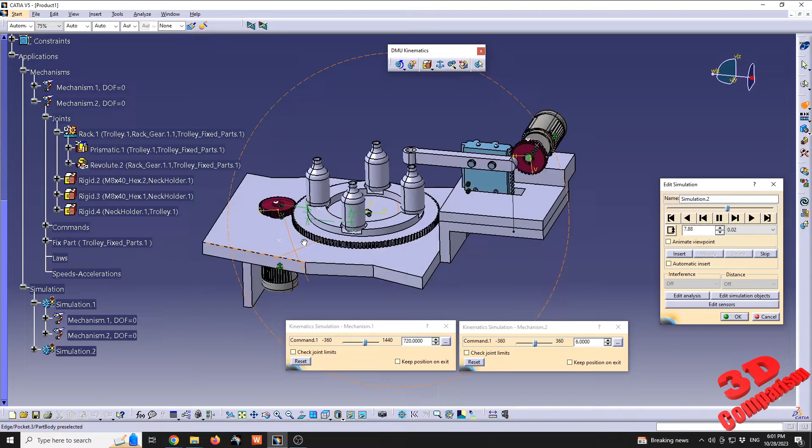I will put the files within the video description, so let's see the final simulation within CATIA V5. We're going to have two mechanisms, both will be angle driven. Where we have the motor, we'll have the first gear angle driven, and for the second one as well, we'll control the rack position.

To get started, I will start from scratch. That means I'm going to close everything, and we're going to see the files will be over here.

Now, initially I will define an assembly. Within this assembly, I will select it, go to components, and add existing components. We could also make use of existing components with positioning, which would also define some constraints when the elements are added. But for this case, I will just go like this.

So let's take a look at the file. It will be this one, DMU Kinematics. I will use the preview thumbnails, in this case for large icons, and let's take a look.

Within those files that you can download from GrabCAD, we're going to add the bottle, the fixed components for the first mechanism, the large gear, and the metric 8 bolt. We're going to skip the motor, because this will already be added within the fixed part, as well as within this subassembly.

We're going to select the neck holder, part 1 as well. This will be embedded within this subassembly. I will select both small gears, so small gear and small gear trolley, the trolley, and also the trolley fixed parts. So these are the components that will be added.

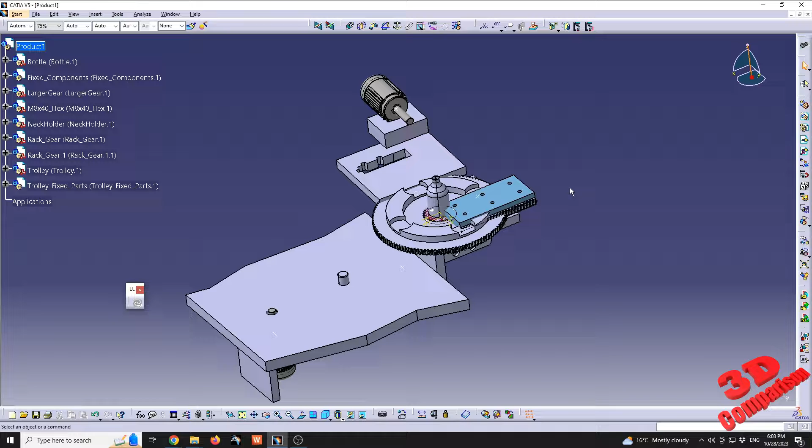In this case, I will select the trolley and move it to the sides. I know that the bottle will be within this mechanism on the left, the large gear as well on the left. This will be the rack gear, as you can see by the name.

I'm just going to move it over here because it's actually the same gear for this joint and for the other one. And we're also going to have the bolt that I'm going to move, and the neck holder for the bottles. So these are the components. I'm going to disable the snap automatically to selected object option.

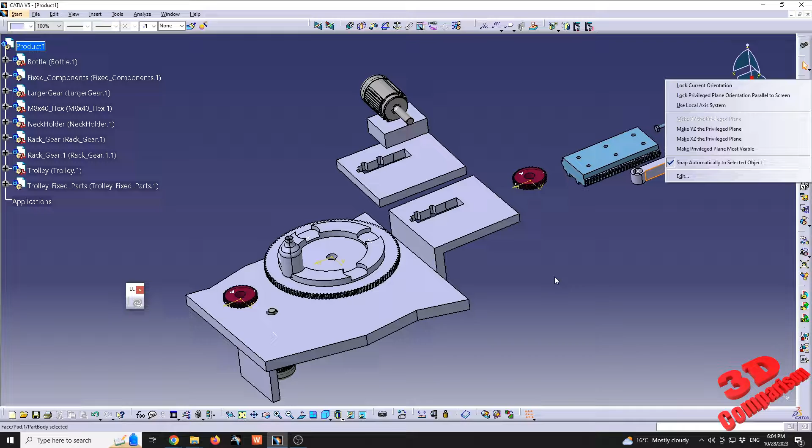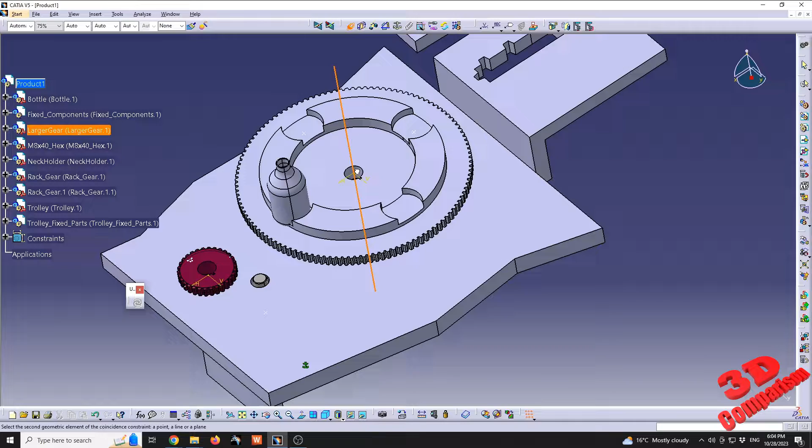And we can start positioning the components. So I'm going to define a fixed component for this large assembly, named fixed components. Afterwards, using the coincidence constraint, I'm going to position the large gear over here.

I'm going to press Ctrl and Y to redo the last feature. In this case it will be a coincidence constraint, and I'm going to position this all the way to the flat table over here. I'm going to do the same with the small gear.

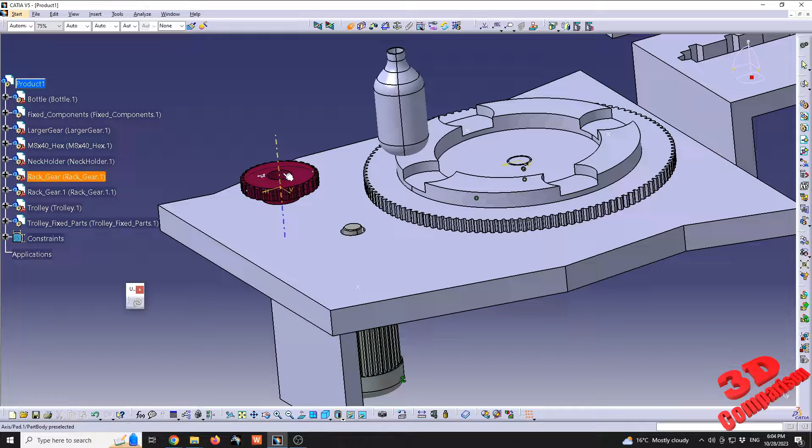Again, Ctrl Y to rapidly redo the last feature within CATIA. Again Ctrl Y, and we're going to add this coincidence over here.

Now for the bottles, we need to have a total of 4 bottles. Therefore, I will select the bottle, press Ctrl plus E. This will define multi-instantiation.

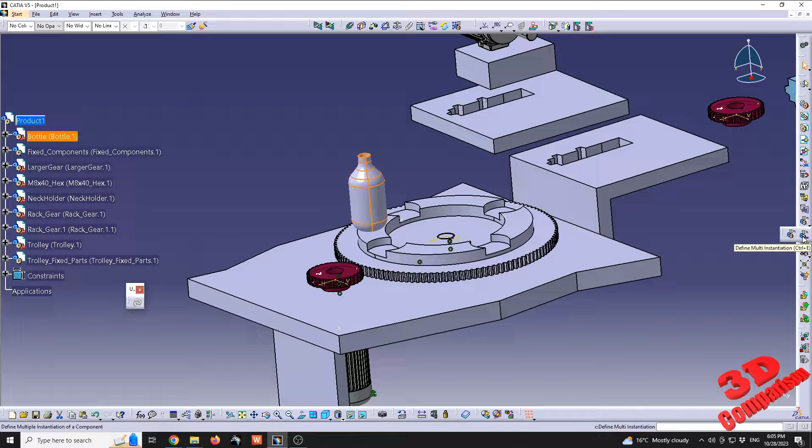And I will define a total of 3 additional new bottles. Afterwards, I will hit OK. If for some reason the alignment of the bottle is not the same, you can swap that over here within the reference. You can also increase the spacing, but I will just leave it like this since we're going to reposition those.

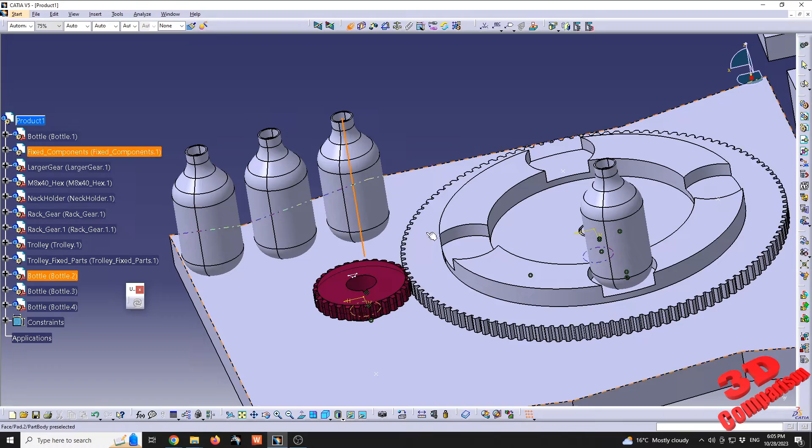After that, I'm going to press again on coincidence, and we're going to position the bottles on the large assembly. Each bottle will also have a surface at the bottom that we can use to finally position that bottle onto that gear.

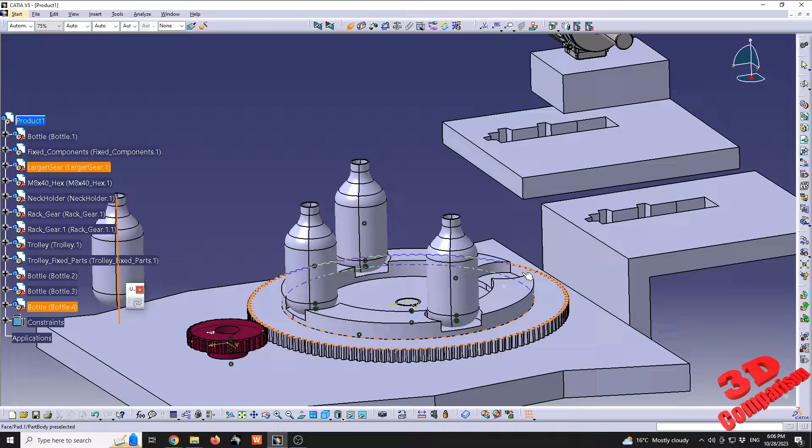So this is quite repetitive, but you can make use of hotkeys in order to rapidly align those components. We still have the last bottle with this axis. You will always find the axis over here on the width of the component, and afterwards we're just going to have that surface. So all the elements of the first mechanism are properly defined.

We can now go to the second one. So I'm going to coincidence this with that.

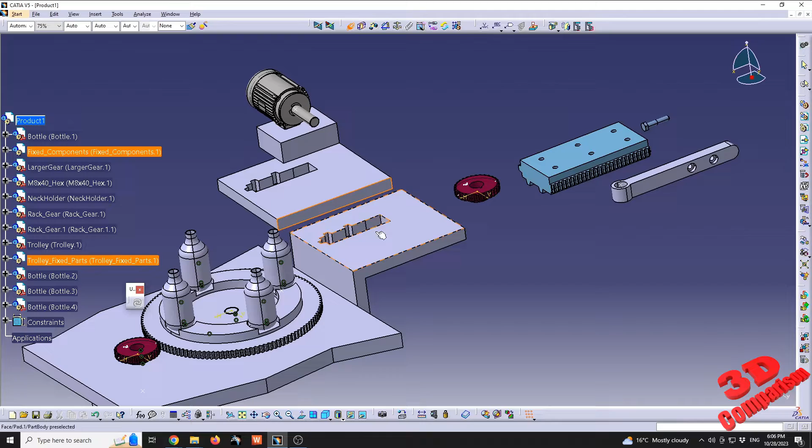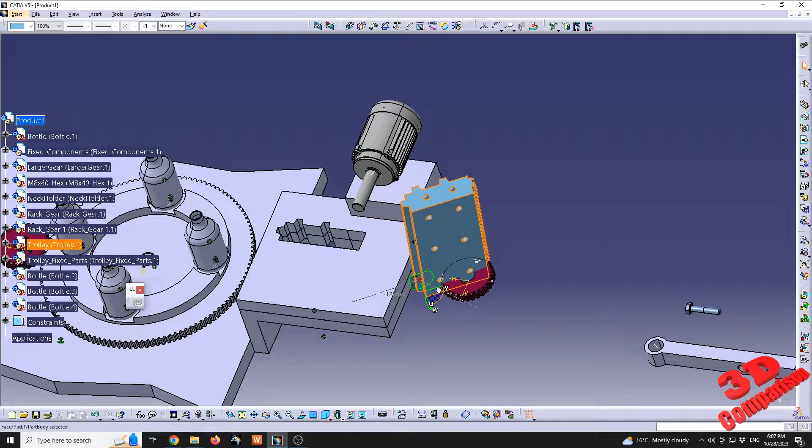Again, Ctrl Y, and we're going to position this as well. Now to make it easy for CATIA to position this, I'm going to use the compass again, so snap to selected, and you're going to see that this trolley should go over there like a puzzle. That means it should be rotated within this position. So I'm just going to slightly rotate it.

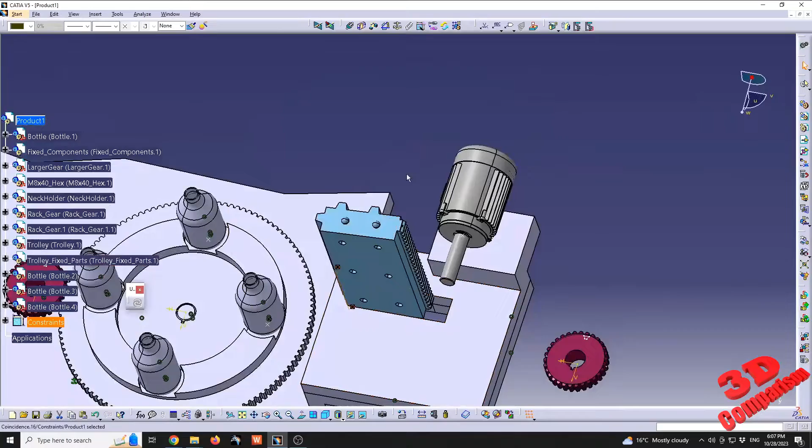Close to the final position, and afterwards I can make use of the coincidence. Let's see, this edge should be coincident with the edge over here. And afterwards we can also add a plane. So this plane should be coincident with the plane over there. And we see that we're going to have that position.

Now, depending on the length of the bottle, this can be adjusted. So for this case study, I'm just going to select the trolley and move it on the z-axis a little bit down. So this will be the axis. I'm just going to slightly move it until this section will be close to that top area. So we see those two cutouts. Somewhere like this should be good enough.

We also need to position the second gear over here on the motor.

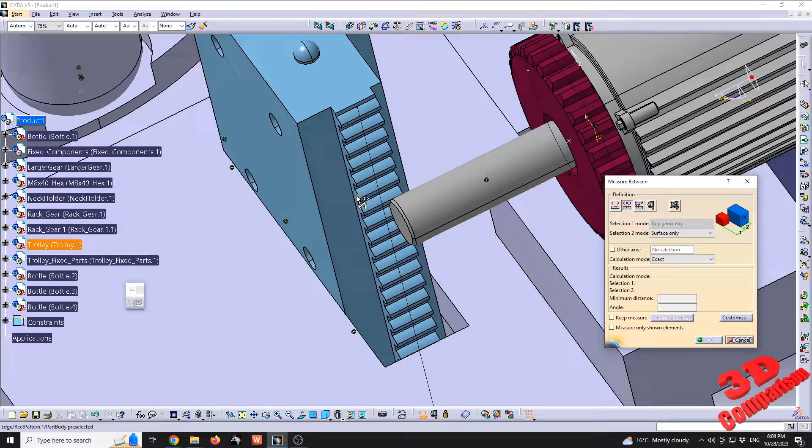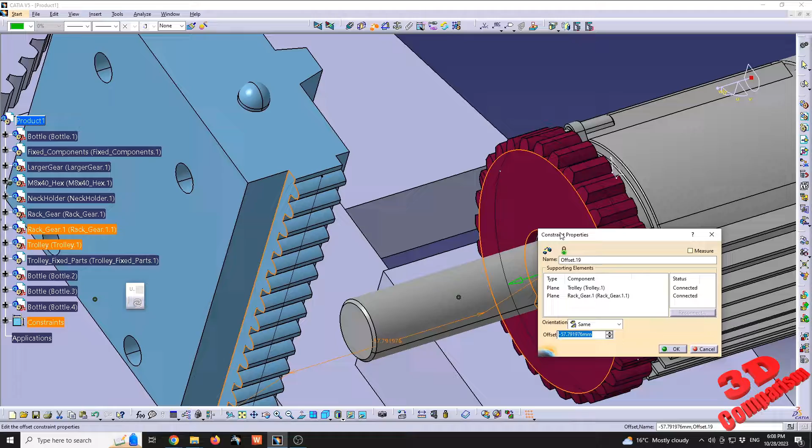Now for the final position, I'm going to measure this trolley. So that means I'm going to make use of the measure between. From this section all the way over here, we're going to see 14 millimeters. And if you're going to measure this as well, we're going to see that this will have 12 millimeters. So that means I need to make use of an offset between this one and that one of 1 millimeter, and that should center it, in this case, -1. And we're going to see that that will center the gear.

Now we're just going to need to replicate, multiply once this bolt. So I have a total of 3. I'm just going to delete the last one.

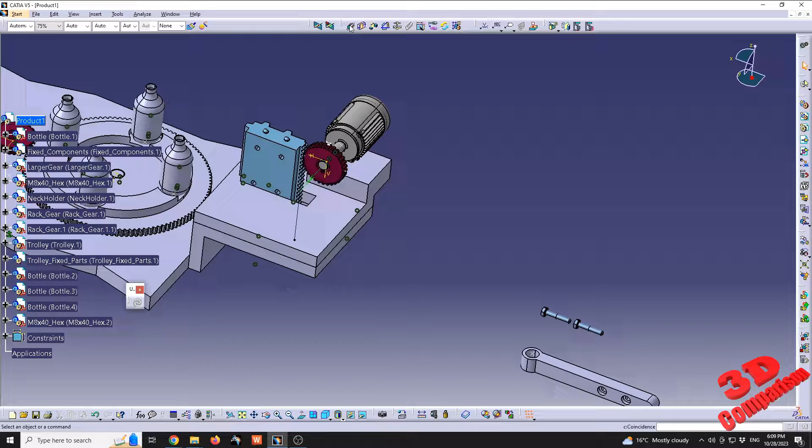And we're going to start positioning these components as well, so that should fit over there. We can center both like this, and afterwards we just have the final position which will be this one, coincidence with that. Now we can also position those bolts.

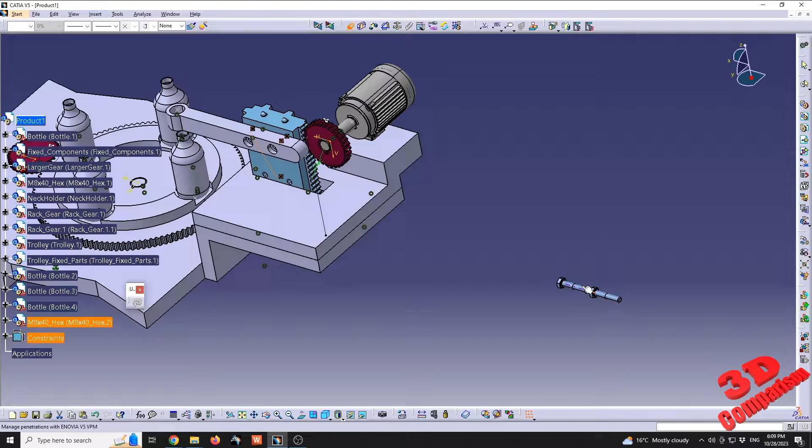So we have the axis. We see that this has been reversed. That means I can go within that. It will be easier if I will just delete that, and I will slightly rotate that bolt.

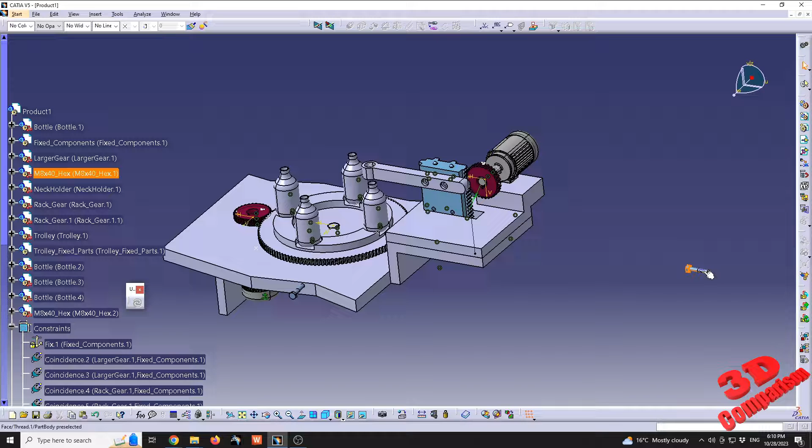And afterwards we're going to have that again multiplied over here. So I will delete this as well, so double click within that, have that deleted, multiply this once. Let's see where will the second one be added. So component to multiply will be this bolt, and we can define the axis like this.

Now keep in mind that this model is not, let's say, at the true scale, so we're going to have a little bit of collision between this bolt and that neck holder.

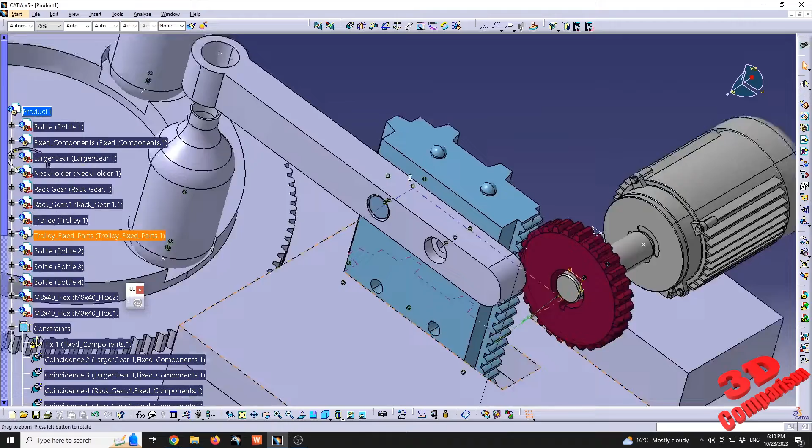I'm going to position it like this, or I can move it even a little bit to the outside area so that it will be easier to work with that. So we already have the axis, which is for this bolt, and now I will define that this surface should match the outside surface.

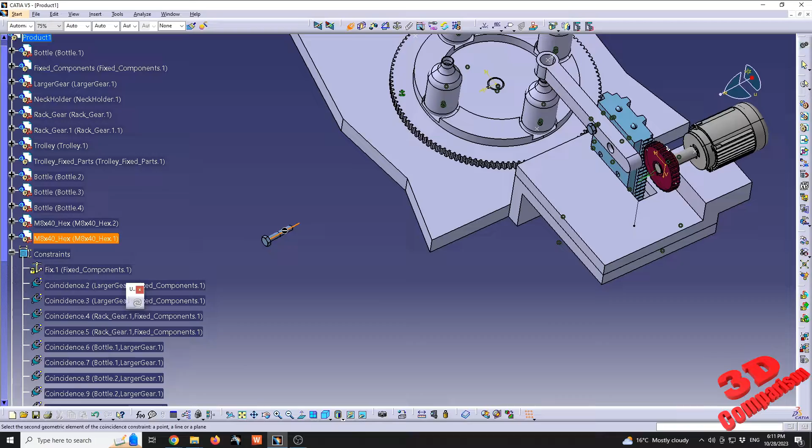And we're going to do the same for the other one over here. And we just have the last surface, which will be that surface with this one. So we have the components in position.

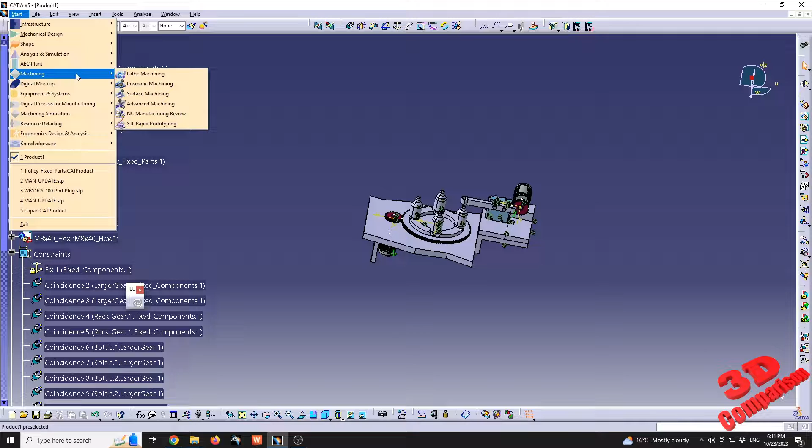Now, if you're going to swap to DMU Kinematics, you're going to see that within DMU Kinematics, we have the possibility to use the assembly constraint conversion. But in this case, since there are two mechanisms over here, CATIA won't be able to properly define those.

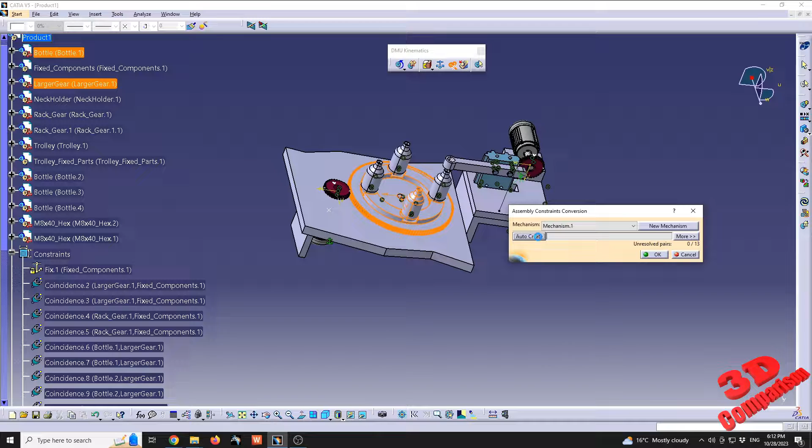So we can define multiple mechanisms over here, but as an example, I'm going to define a new mechanism. I'm going to define a second one, and now I will leave CATIA to auto-create. But as we can see, there are totally a number of 13 pairs of components, and I will go with auto-create. And you're going to see that they have all been resolved.

That means that CATIA has converted the constraints within the mechanism. But all have been added over here to mechanism 1. We see the joints that the software decided to add, and there are, let's say, not pretty well defined.

I have another case study on my channel over here. If you're going to search for DMU Kinematics, this assembly constraint conversion. For some components this works pretty good, but for this one it doesn't.

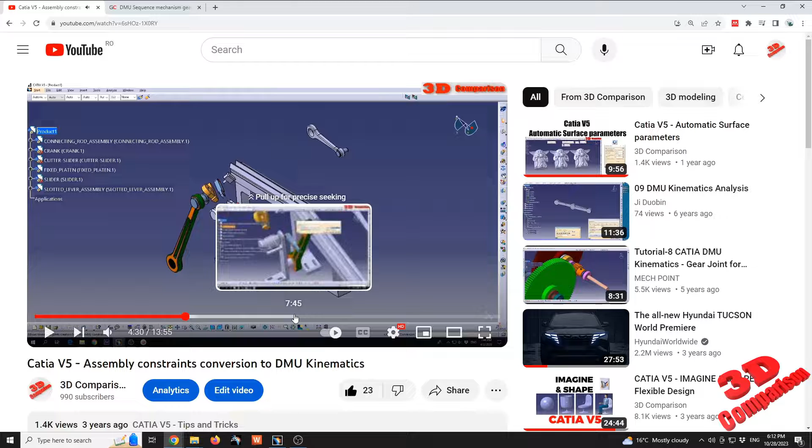So over here the software managed to add those quite well for this mechanism, but since we are currently having a more complex mechanism, CATIA wasn't able to do that. Therefore I will just delete the mechanism created by that auto conversion, so delete all children for this. The same for the second mechanism, and we're going to start from scratch over here.

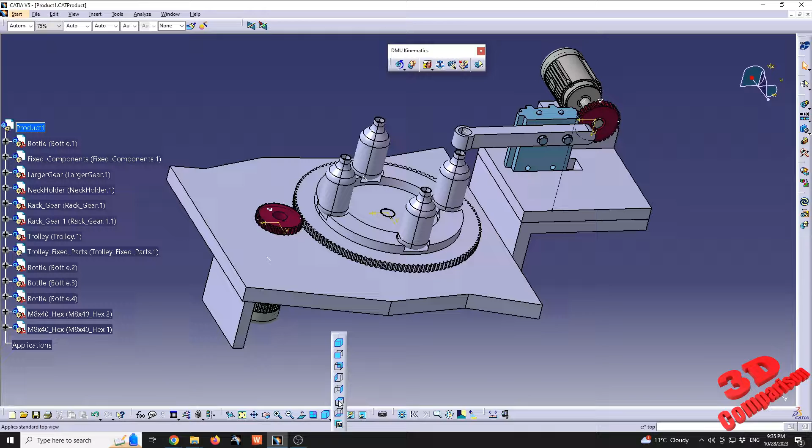So before I start defining various joints, I also want to check how the gears are interlocking. Therefore I'm gonna go over here. Afterwards I will go to the top view, and we're gonna see within the top view that over here we have some collisions between the large gear and the rack gear over here. Therefore I'm gonna slightly rotate the small gear.

So I'm gonna snap automatically to selected with the compass. Afterwards I'm gonna select the small gear. And now I could rotate on this axis, but I can also right click on the red spot over there, on the red vertex. I can go to edit, and I know that this will rotate along W. Therefore I can slightly rotate this gear.

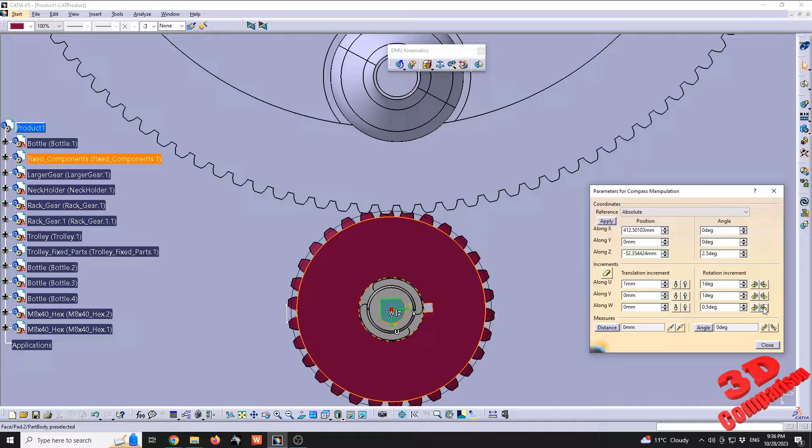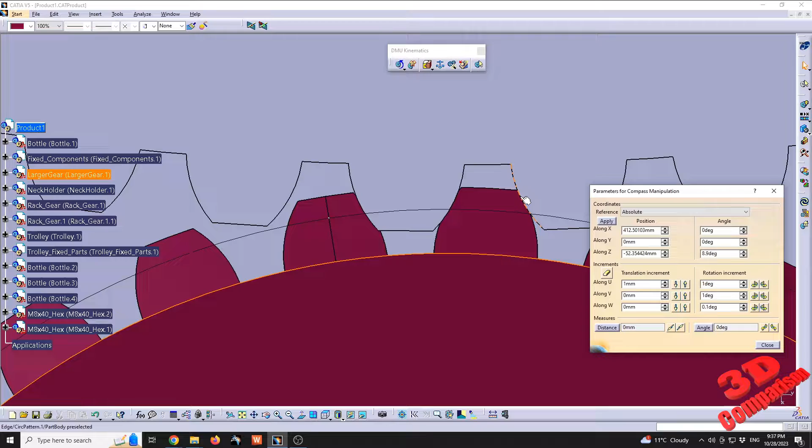Now I will position the gear over here. The models are not very accurate, therefore we're gonna see that some overlap will still remain within our model, but I'm gonna position them something like this. We can even go with a smaller value, for example 0.1, and in this case with 0.1 those will overlap like that. We can do the same for the other gear over here, but let me just check how they are interlocking now.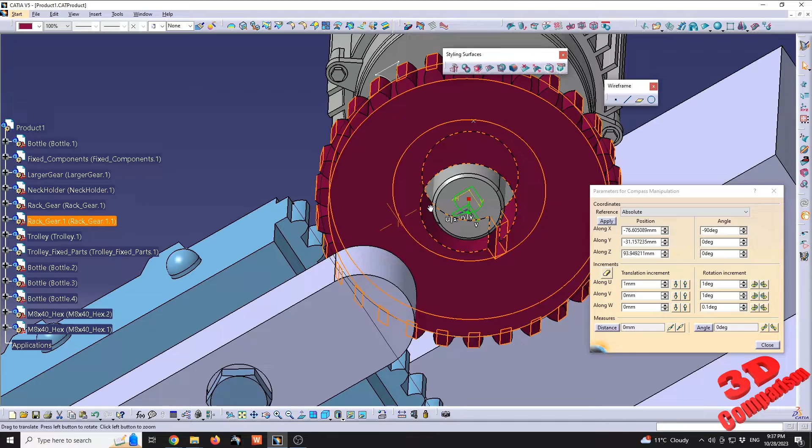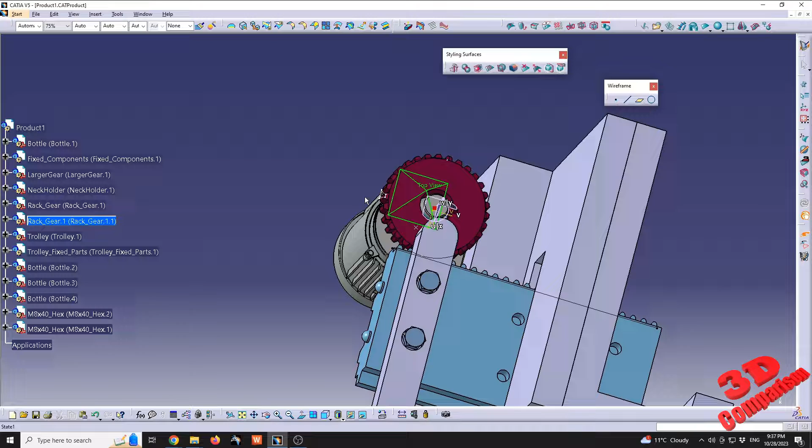And we see this is slightly misaligned, therefore I'm gonna go within edit, and I'm gonna select a different view. So in this case the left view will be this one from the top. So in this case it will be front view, and we're gonna have this view. We can also change views by pressing F4. We're gonna see that we can move the mouse within the viewport. Therefore we're gonna know that this will be the top view in this case, where we're gonna see the alignment of that.

So I'm gonna go within the top view, which will be over here. Now I see that this rack gear is, let's say, blocking the view. Therefore, I can just hide it for now. I also added Alt-V as a hotkey. This is similar to Fusion. I highly recommend that you use hotkeys. And now we see how this gear and rack will align.

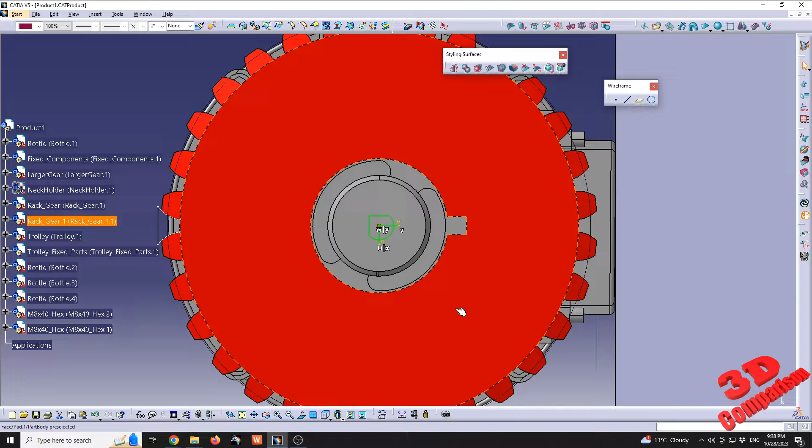Therefore, I'm going to start to rotate this. So for the axis, we're going to see that if I rotate it on this axis, it will slightly move like that. So I'm just going to undo that. Even though I undo, the part is still in red. That means there's a local update within the assembly. So currently I am within Imagine Shape workbench. I'm going to double click on product 1, press Ctrl and U for update, or we can click on that.

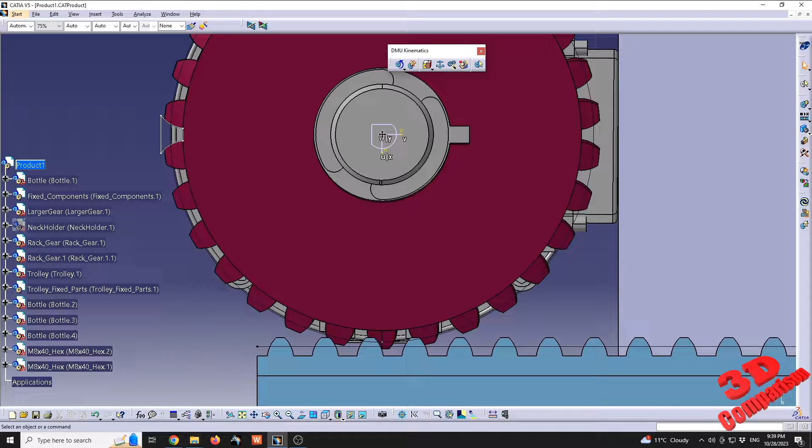So we see update position, the gear rotated on this axis. Therefore, that was not the correct axis. So keep in mind when you are rotating components to always verify the correct axis. So I'm gonna rotate it back until we're within a normal view. So we see with 1 degree it should rotate like that, and this is again close to the normal view.

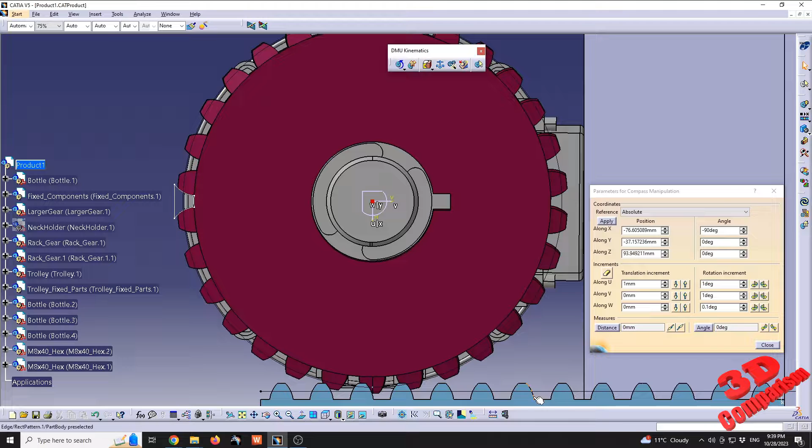We can also go over here for the absolute rotation, and I can add -90 and 0, and we know that if I hit apply, the model will be within the initial alignment. Even though I see there are some slight rotations over here, I'm just going to press F2 to check if we are within a different view. So if I go to view, we're going to have render styles, but this is parallel. Therefore, the object is slightly rotated.

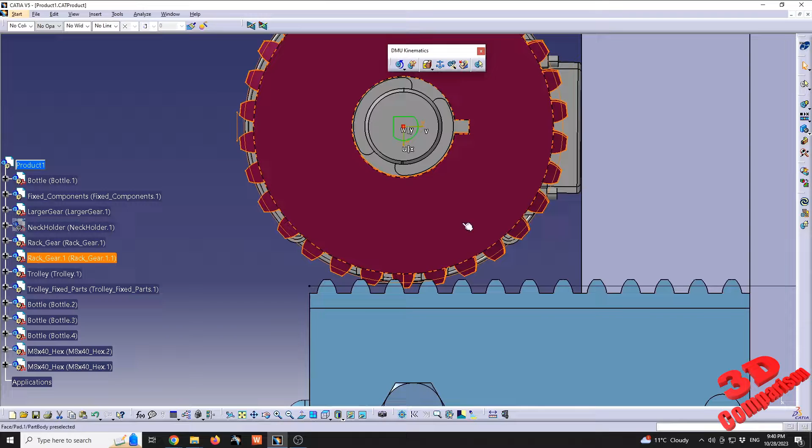As we can see on the rack, with normal view, we don't see the other, let's say, edge. But over here, for the gear, we're going to see that. So I will just slightly change this. We have the absolute values, and we see that for some reason the absolute values are okay positioned, but still the object is a little bit misaligned. Therefore, I'm going to slightly rotate this. So I'm going to go with 0.5 on that axis. Okay, so I will leave it like this, even though there are some slight misaligned components over there.

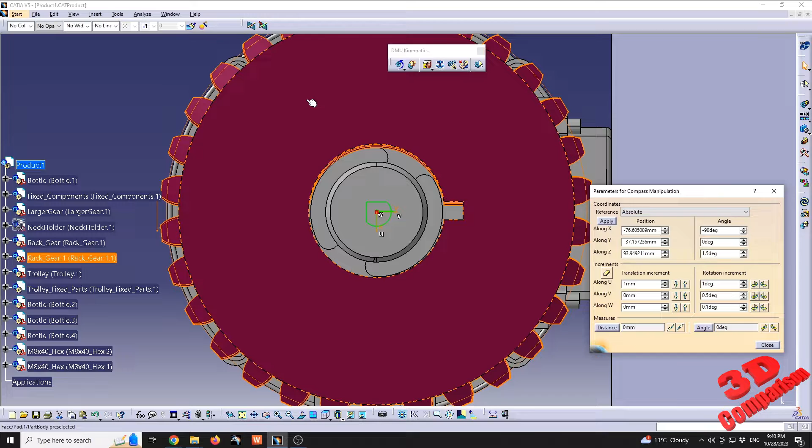In order to fix this, the easiest solution is to add some constraints and afterwards have those deleted. So to do that, I will go back to assembly design. We're gonna go to coincidence, and I'm gonna make this coincident with that. As you can see, those have been aligned, and we know that we had an offset between this face and this face. We see that there's already a constraint over there, so I'm just gonna have that deleted for now. Realign the gear over here on that.

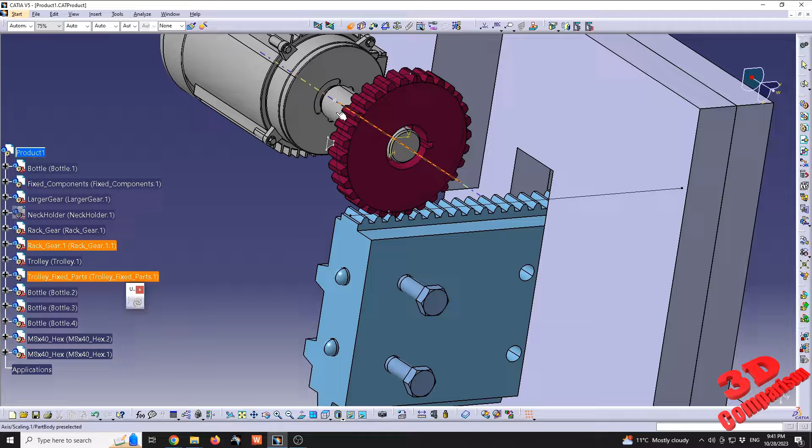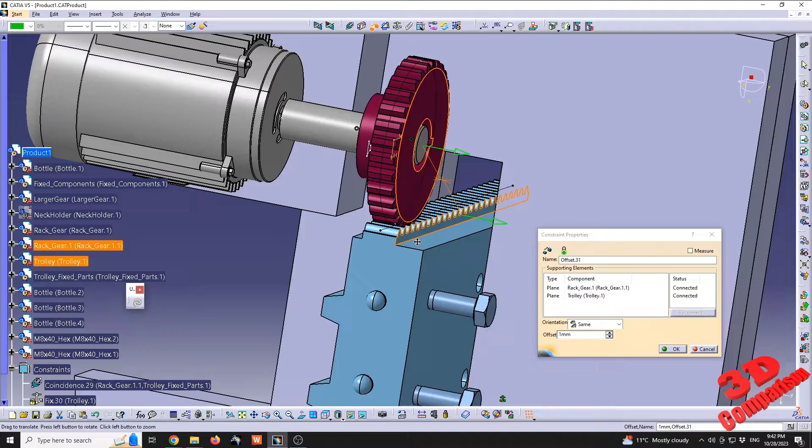Afterwards, position it at -1 millimeter, and as we saw, the rack moved in this case, so that is not what we want. We want the gear to move alongside the rack. Therefore, I will make that fix, and now with an offset I will calibrate this to be at 1 millimeter, and now it should be properly aligned. Therefore, I can have all of those deleted. I can go back to that view.

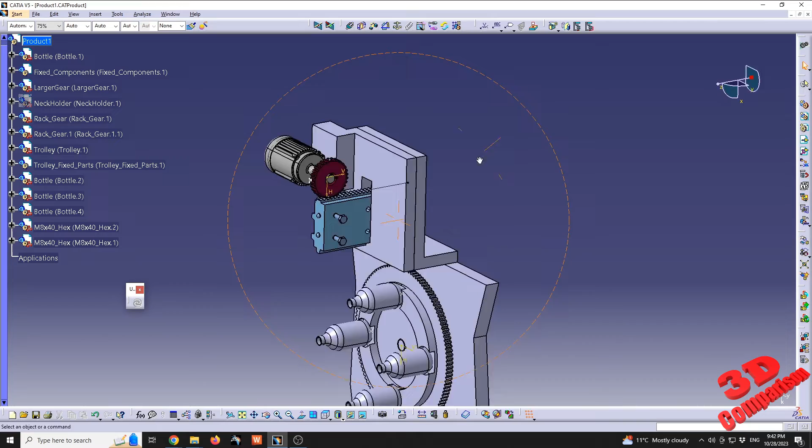Therefore, I can press F4 and move around, but as we can see, since now I'm in assembly design, that won't work anymore. So if I press F4, I'm not able to select those views. But if I go back to DMU Kinematics over here, we're gonna see how we can manipulate that camera.

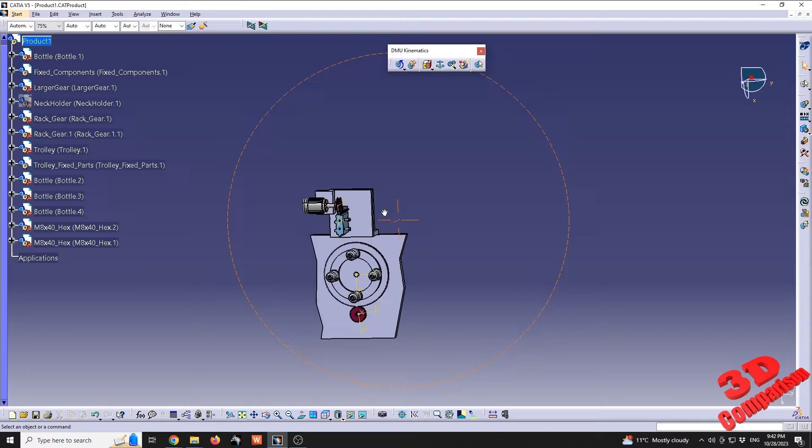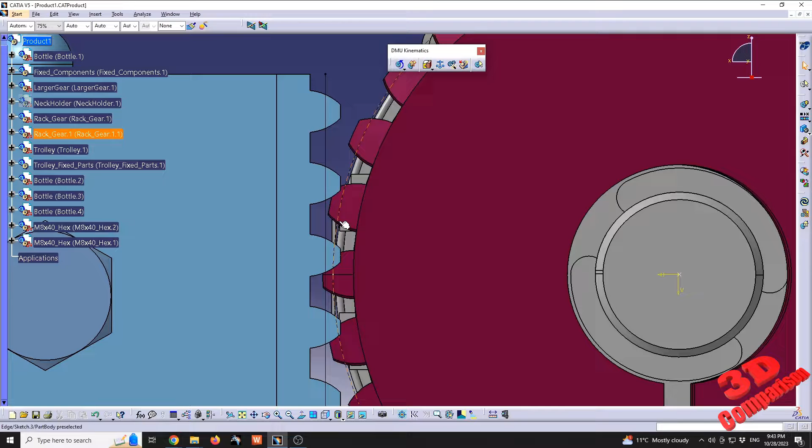Okay, so for some reason that F4 doesn't work anymore. Therefore, I will just make use of the standard views. So we have the left view and we have the right view in this case, which will be this one. Okay, so I see that the gear will be slightly rotated, so that's how the model was. It's not important to calibrate it.

Since the model has that bend shape over there, we are just gonna rotate it on this axis, which will be this one. So I will grab that axis and I will slightly rotate it. So I'm just gonna position like this. As we can see, this gear and the rack will be better, let's say, defined than the small gear and the large gear. Okay, now since we have all the elements aligned properly, this is why it's important. So for this section, if you wanna calibrate the exact alignment, you can do that easily using the compass.

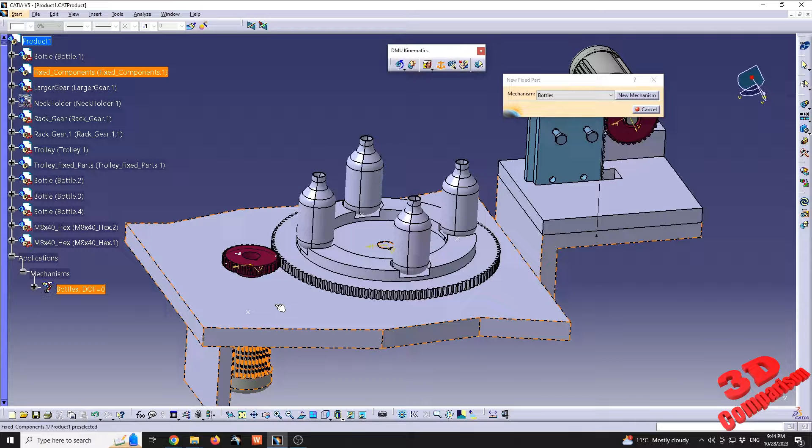Now we're going to define the mechanism. So the first mechanism, I'm going to start with the fixed part. So we'll go over here to the fixed part. I will define a new mechanism. We can leave it as mechanism 1, or we can give it a different name. For example, bottles. I'm going to click OK. And afterwards, with the mechanism bottle selected, I'm going to move the cursor over the fixed component over here. Therefore, within the newly defined mechanism, this will be the fixed component for this bottles mechanism.

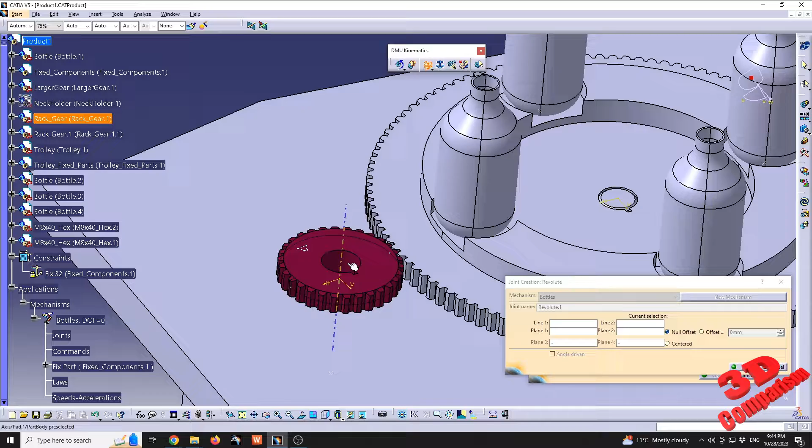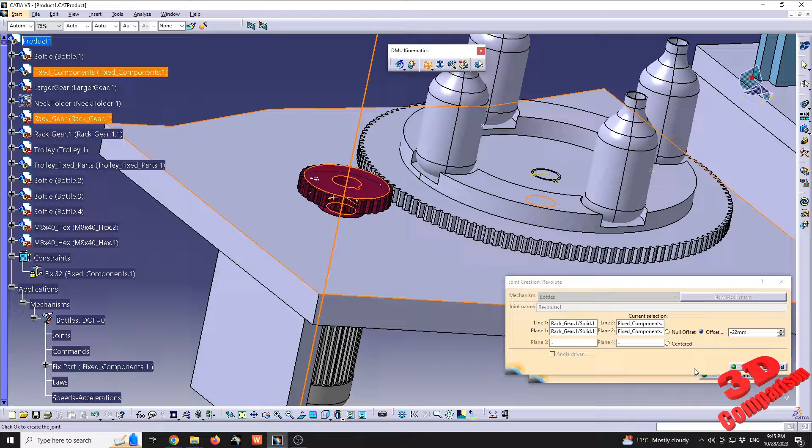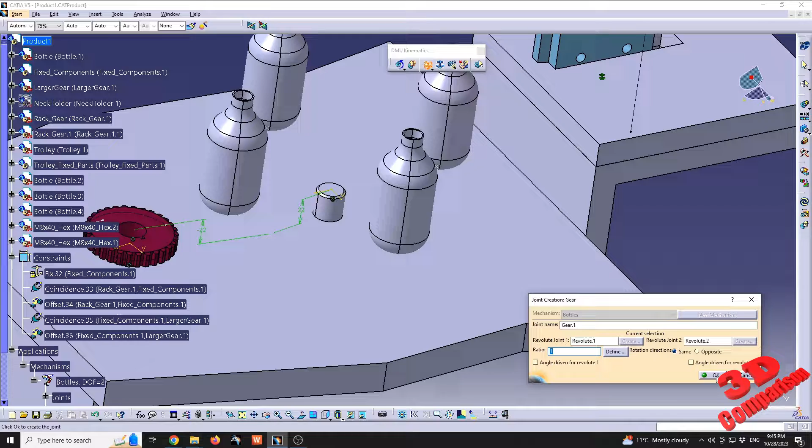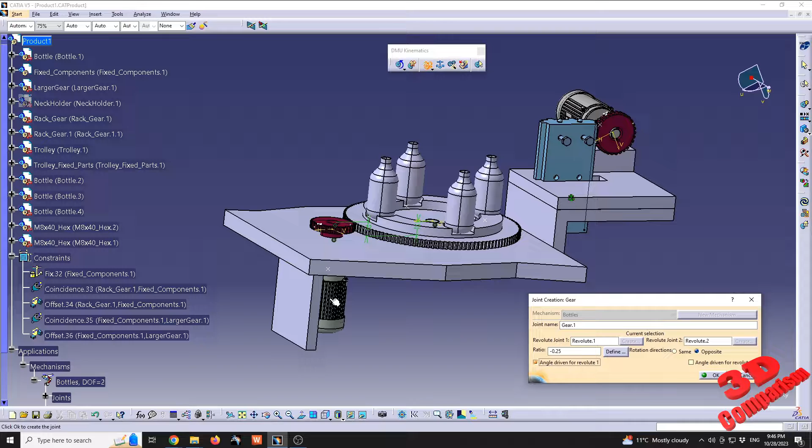And for the second one, I'm gonna hide the large gear and I'm gonna select the middle axis. Afterwards, the axis inside the gear. Now the top surface and the bottom, and again I will maintain that 22 millimeter offset. I will send the large gear back so we can see how that will simulate. We know that this has to be opposite, and for the ratio it will be -0.25. Now to define the angle driven component, since we have the motor over here, I'm going to define that angle driven revolute 1 will be the driven one. And afterwards we can click OK.

We're going to have this notice that the mechanism can be simulated. Therefore we can start that bottle simulation. And I will go all the way to 360. Afterwards I will hit insert and I will check the animation to see if those gears are properly working. So as we added that opposite and that minus 0.25, those gears should work properly.

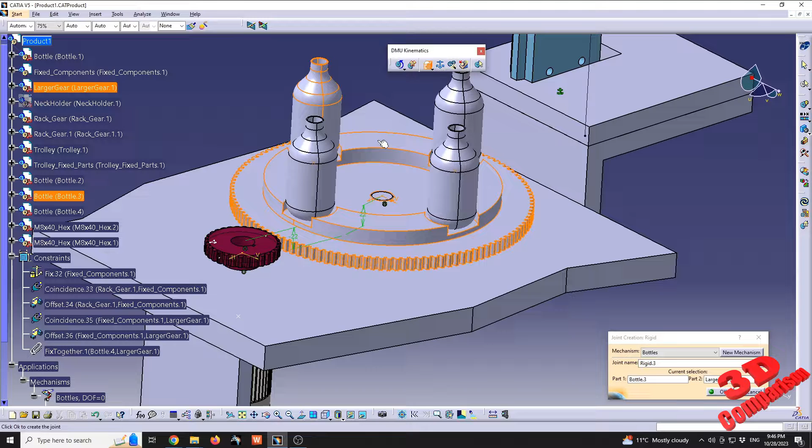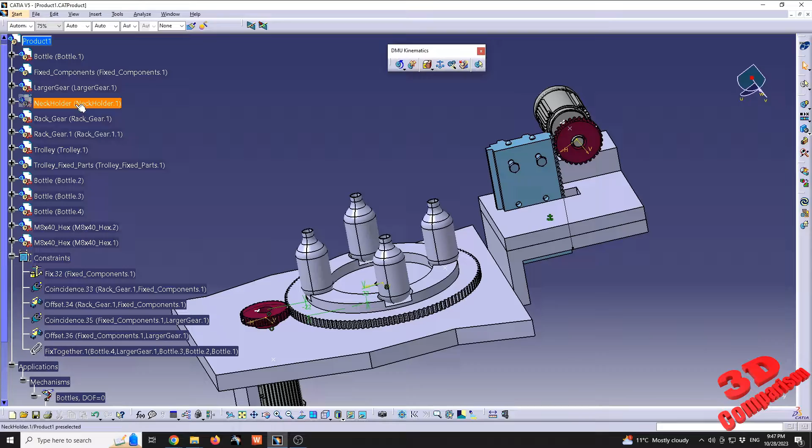And now for the first mechanism, we just need to add the other components, which will be the bottle. This will be set as rigid joints between the bottle and the gear. So I will just redo that for all components by using the hotkeys for the last feature, which is Ctrl and Y within CATIA. And now if I try to simulate this, we're gonna see that all the bottles should move along with that gear. Okay, so we have the first mechanism defined. Now we have this neck holder that will need to be activated by the trolley. Therefore, I will show this. So we see that bottle neck holder over there.

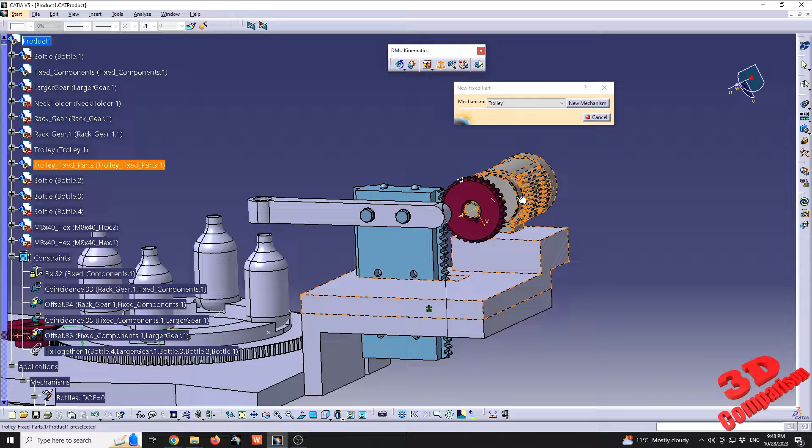Now, for the second component, the workflow will be the same. Therefore, we need to define a fixed part. But this new fixed part will be created within the new mechanism, which I'm gonna call this. Okay. We see that this is the neck holder. I'm just gonna call this trolley. And for the trolley mechanism, the fixed part will be this one. So the sub-assembly that has this extruded part and the motor. And now we need to define the components over here. So as we can see, we have a gear joint and we also have a rack joint.

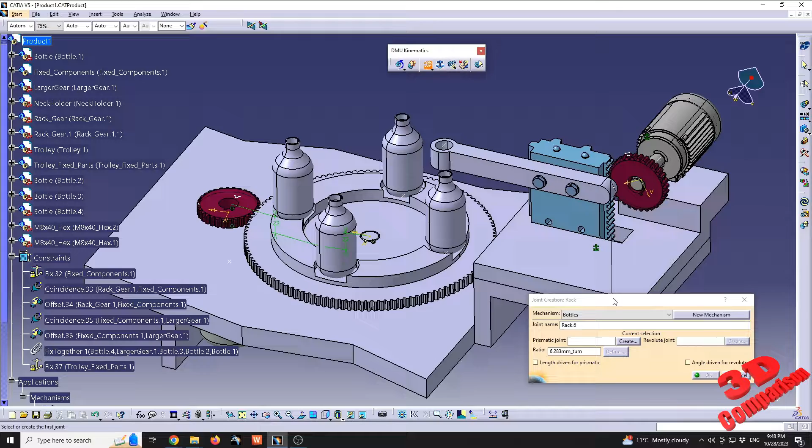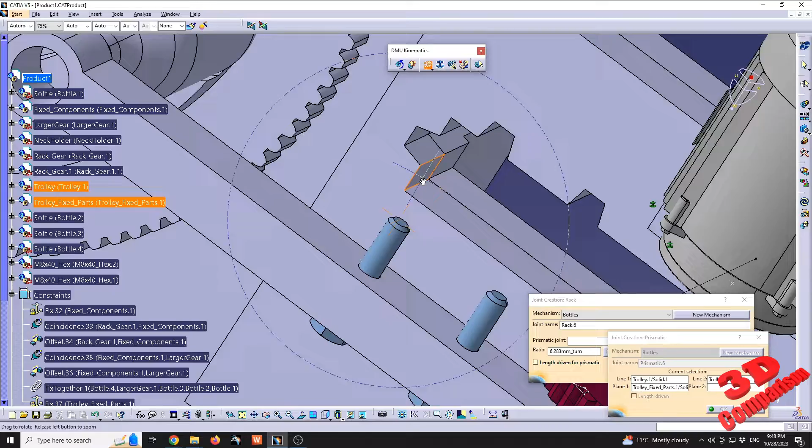So for the rack joint, it will be very similar to the gear joint, but it will be on one side a prismatic joint, which is this side with a trolley, and for the other one a revolute joint. So for a prismatic we need to define, as you can see, a line and a plane. I will select this line, afterwards hide that trolley, select the same edge on the cutout, afterwards that surface and the equivalent face on the trolley. So we have this defined.

We also have the ratio over here, as we can see. So I'm also going to define the revolute, and afterwards we're going to see how we can change this ratio, which is currently set to 6.283 millimeters per turn. So for the revolute we're going to have the gear, the motor, and those two surfaces. This will be angle driven for revolute, since we have the motor over here.

And for the ratio we have this define button, and if I'm going to click on this one, we're going to see that actually we need to define a radius, and that radius will give us a ratio. For this gear we already have a sketch over here with the outline of the gear, so I'm going to select that. We're going to see the radius will be 34, therefore that will be the ratio. I'm going to click OK.

And now we just need to check the orientation, so the ratio will be either negative or positive. As this looks, it should be with minus. So I'm going to set this to minus, I will hit OK. We're going to see that the mechanism cannot be simulated. Why? Because the joint was created over here. So I'm going to select this.

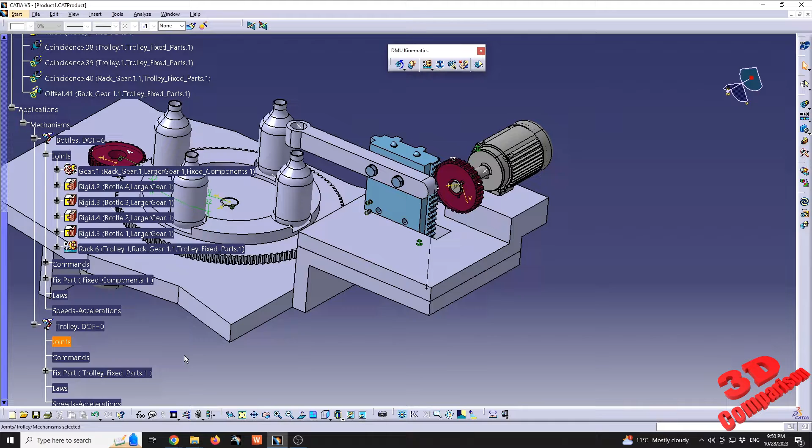We're going to see that we don't have the possibility to copy this and move it to the other mechanism. So this should have been over here within these joints. So I can select that, grab it and put it over here on the joint, but we see that CATIA doesn't allow us to move mechanisms like this. So the only option in this case will be to have this deleted. Or let me see if I can somehow change the parent mechanism, but there are no options for that. So I'm just gonna delete that.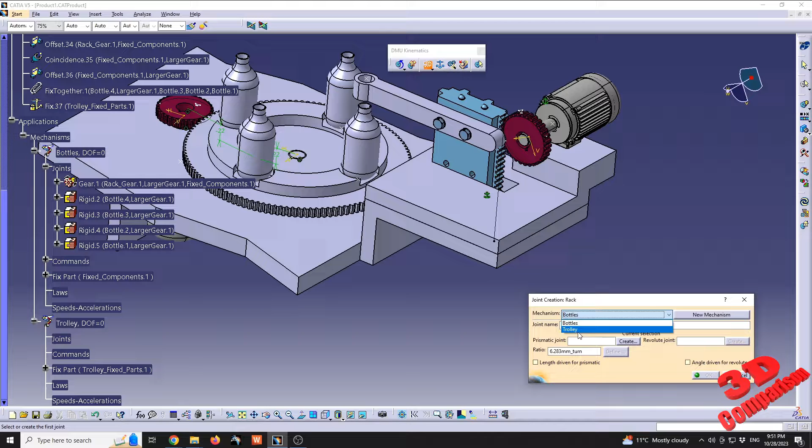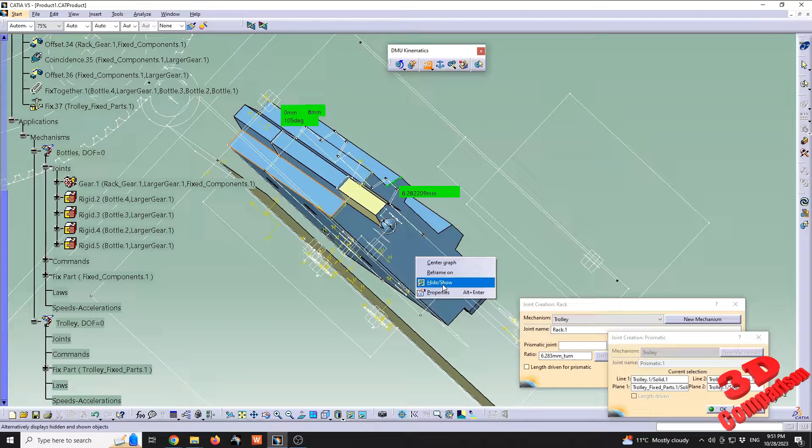We see that when I delete it, all the children will be deleted as well, so some coincidence and offsets. And now when I define the rack joint, I need to select over here the trolley. So this was that initial mistake. Keep this in mind when you are defining multiple mechanisms within the same assembly. So define again those same elements, which will be those, the plane and the plane on the trolley, send that back, go with OK, create.

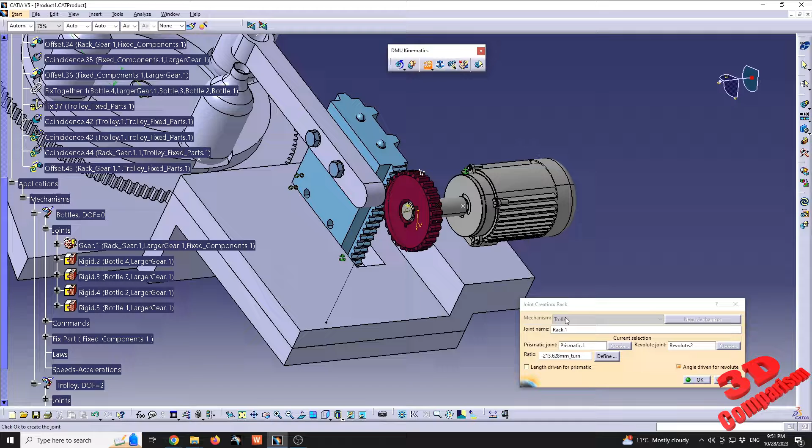Now for the gear, have that offset, define the ratio using the sketch. I will put a minus over here, and this will be angle driven. So now as soon as I click OK, since this will be set to trolley, we're going to have the notification that the mechanism can now be simulated. Therefore I will check how that trolley mechanism will work. For example, if I'm going to rotate this 50 degrees, this should go all the way down.

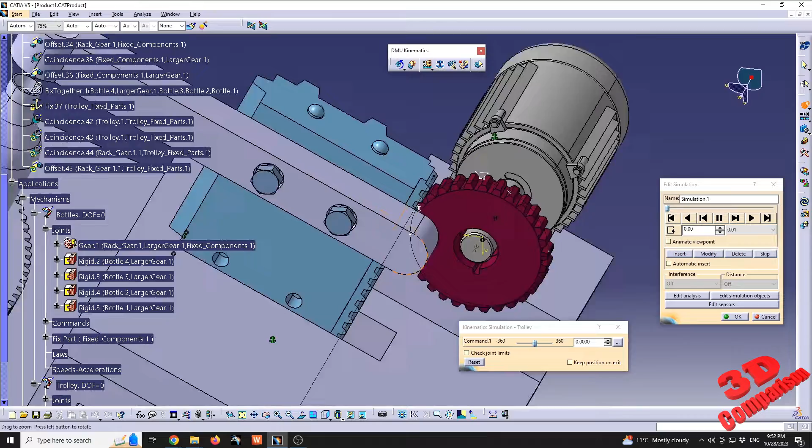I just want to check how the rack and the gear are interlocking. So I'm going to play this animation, and we see the gear will rotate in this direction and the trolley will go downwards. So this is the correct orientation. Therefore having that ratio with minus is correct.

Now we just need to add the neck holder and those two bolts within the same assembly, which will be done using the rigid joint. We know that this should be in the trolley, so this should be rigid to that. And we can make those two bolts either from the trolley or the neck holder. So we see that the mechanism can no longer be simulated. Why? Because I added it again over here within the first mechanism. So I will undo that.

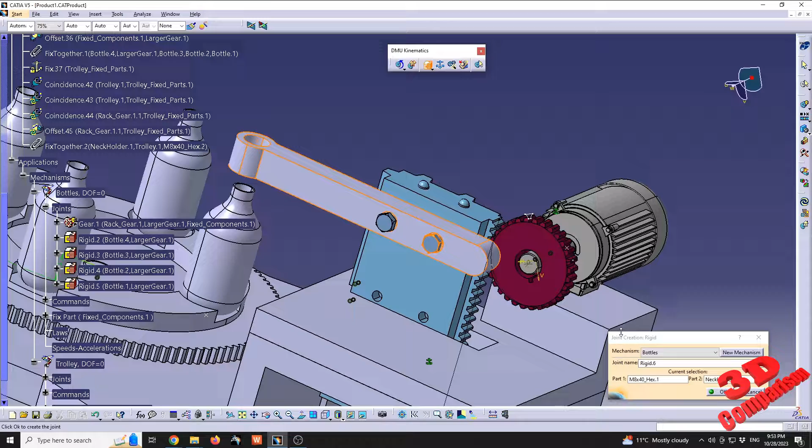Keep this in mind, always check the mechanism where you are defining so that there won't be any problems over there. So now we don't have that error anymore, and again those two, but in the trolley. And we see that we have the notification that the mechanism can now be simulated. Therefore, I will select the simulation command over here. I will select both bottles and trolley for this.

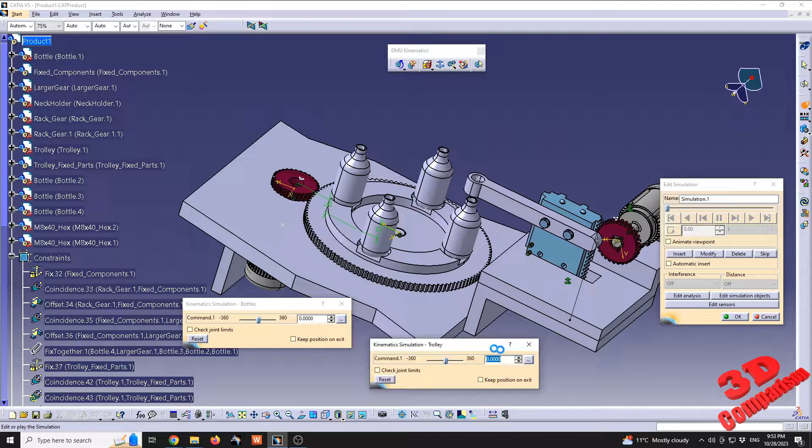Click OK. And now we're gonna have all the controls overlapped. Therefore, we're gonna need to change them. So I put the bottles to the left, the trolley to the right. And let's see, for each gear we only have 360 degrees. Therefore, we need to increase the limit over here for the first one. To do that, you can go on these 3 points, and we have the highest values, 1440.

And for the other one, we can keep it like this. So we see that this will be, let's say, the first step. I would like the trolley to go down and afterwards go back. Therefore, I will add 50 over here. I will hit enter. We see that the trolley moved to the bottom.

Afterwards, I will hit insert. The next step, we're gonna see the steps over here. So 1.0, this is the first step. For the second step, I want this trolley to go back to 0. So this gear will rotate back to 0. Hit insert again. We see those steps over here.

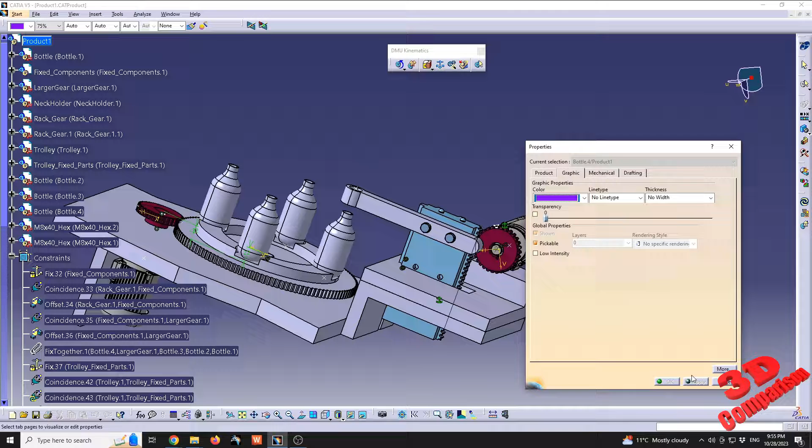And afterwards, we want to change the bottle. So this is the initial bottle, bottle number 4. I will also change the color of that bottle, so make it different. Okay, let's see if we can change the color while we are editing the simulation. Let's see, graphic. I'm just gonna make that purple. But for some reason, while we are in simulation, we can't do that. Therefore, I'm just gonna proceed with the simulation.

So I'm gonna make the small gear rotate 360 degrees. That means the large one will rotate only 90. So 360 over here. Hit insert again. We're gonna put the neck holder down, so 50, insert, 0, insert. Afterwards, you're gonna go to 720, insert, 50, 0, insert. Now 1080, enter, insert. This should be 50, insert, 0, insert.

And you're gonna go all the way to the last one, which will be this one. And now 50, and now 0 again. So a total of 14 steps. If I move the animation to the start using this jump to start button, I will change the interpolation so we can better visualize the simulation, and I will hit play.

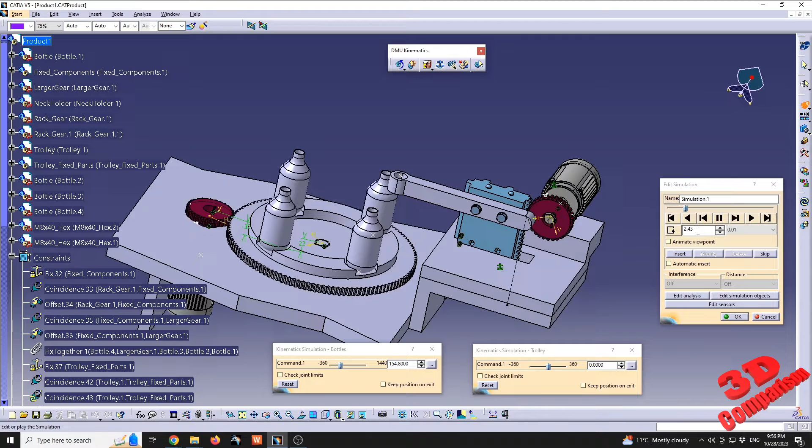We're gonna see the first step will be the trolley. So this should rotate, that should slide down. We see now that 2 first steps were completed. The bottles will now rotate. The second bottle is positioned, and we have that movement for the trolley. So this is how you can control an assembly that integrates 2 mechanisms. The same principle will apply to more mechanisms within the same assembly.

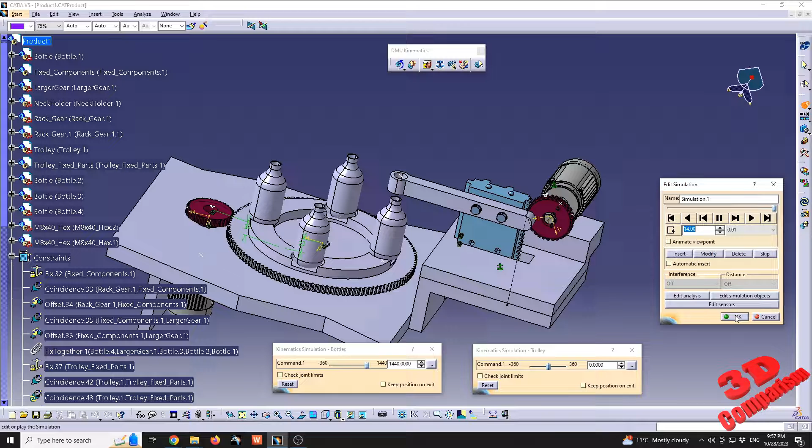As you can see, one of the drawbacks is that once we started this simulation, we no longer have the possibility to change those colors. Let's see if I'm gonna go with material. No, that material won't be added. But we see that now we are going for the last bottle, and over here the animation should finish. So I'm gonna click on OK, and now I'm gonna try to change the color of this bottle. And as we can see, we can do that, but all the bottles will be linked because they are copies of each other. So keep that also in mind.

And if you want to change the bottle design, you can easily use Imagine and Shape for this. So let's see how we can change that. For example, for bottle 4, I will double click on bottle 4 over here. This will take me straight to Imagine and Shape, since this was the last workbench where I edited some elements in CATIA. If you are in Part Design, you can easily jump to Imagine and Shape by going to start, shape, Imagine and Shape. And within Imagine and Shape, I will select the YZ plane.

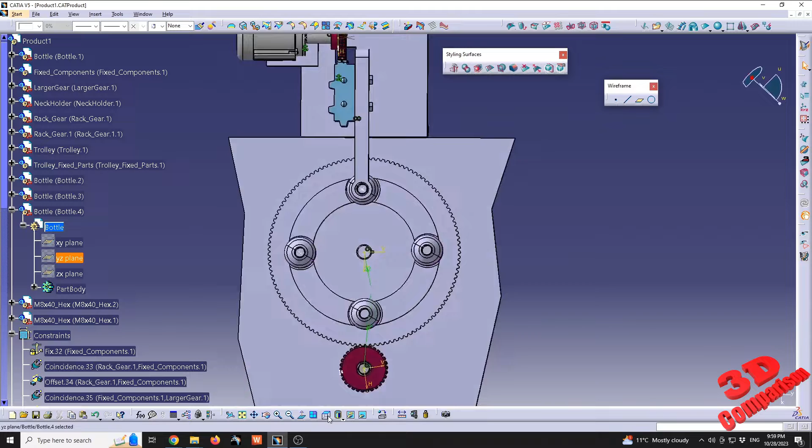I'm gonna make this no longer be snapped over here. So with that plane selected, I'm gonna go normal to, like this. And afterwards, if I click on revolve, we're gonna see how we can have that bottle drawn. But we need to be aligned with the view. Therefore, I'm gonna go over here. So this will be top view, this will be back, and I will need to go within the front view for this case study.

Now, since this is aligned with the view, if I go directly within Revolve, you're gonna see that axis, and if I start clicking to add points, we're gonna rapidly trace a bottle. So we're gonna see that bottle profile appearing. For the bottom, if I click on that, it should close that loop. So by clicking on this one, now it's also closed at the top.

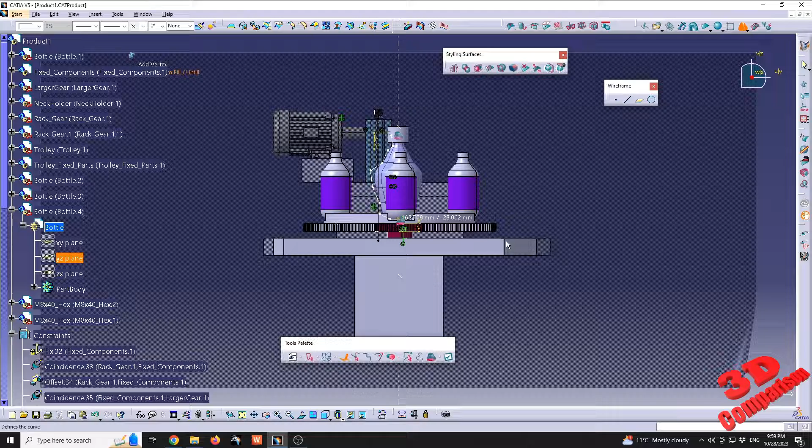So if you no longer wanna have that closed at the top, we can click on that and make it only on the bottom. Afterwards, if I hit space, we're gonna have that bottle traced over here, and we can further change the bottles if you want to. We can just select those points and have them dragged. And since all the bottle parts are linked, multiplied using multi-instantiation with Ctrl-E in Assembly Design, if we change one, all of those components will act the same and they will all change. So we can also change the scale of the bottle.